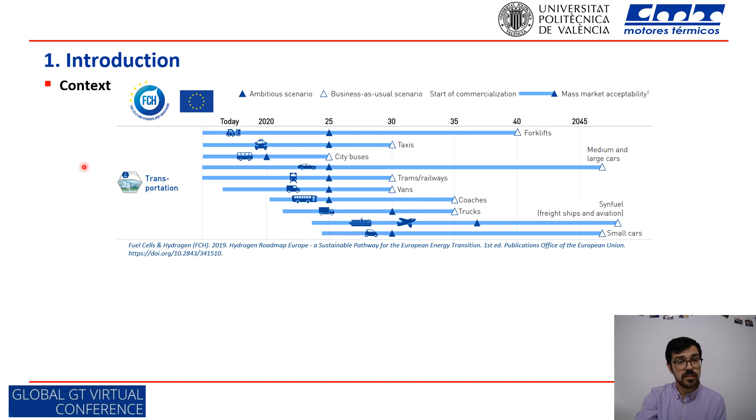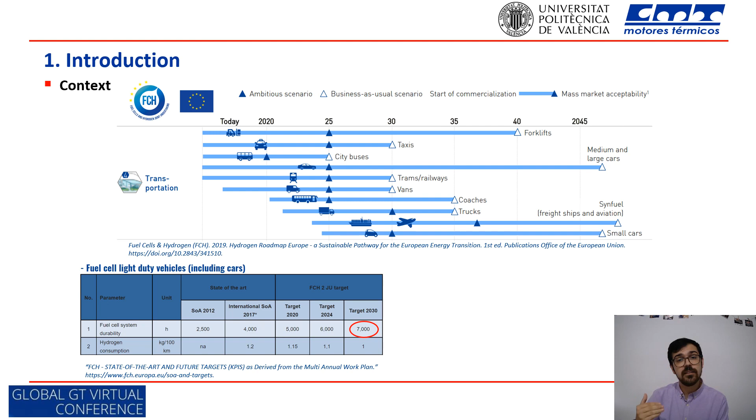So why have we focused our research on hydrogen fuel cell? Well, in Europe especially, but also in the industry in general, we have seen recently quite a lot of interest in developing hydrogen fuel cell technology to decarbonize the transportation sector, and in particular for the light-duty vehicle application, durability, together with the limited number of hydrogen refueling stations, are preventing the mass deployment of fuel cell vehicles.

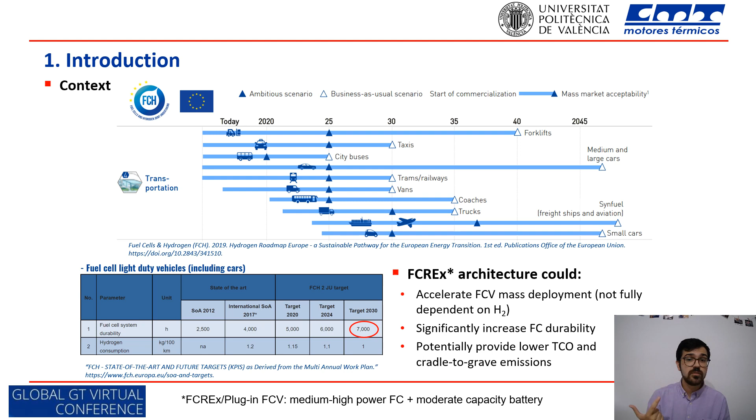So in light of this situation, what we did was propose a fuel cell range extender vehicle. It's like a plug-in vehicle with a medium to high power fuel cell and a moderate battery capacity. Since you don't depend solely on the fuel cell and on the hydrogen, you can accelerate the fuel cell vehicle mass deployment, increase the fuel cell durability, and potentially reduce the total cost of ownership and the cradle-to-grave emissions.

How do we face this problem? Well, at CMT Motores Termicos, we research fuel cell technology from the cell to the fuel cell vehicle level, focusing on both modeling and experimental activities. On the modeling side, we use GT Suite for 0D and 1D activities to model the fuel cell stack, fuel cell system, and fuel cell vehicle that we have used in this study, but we also use 3D CFD for the cell scale.

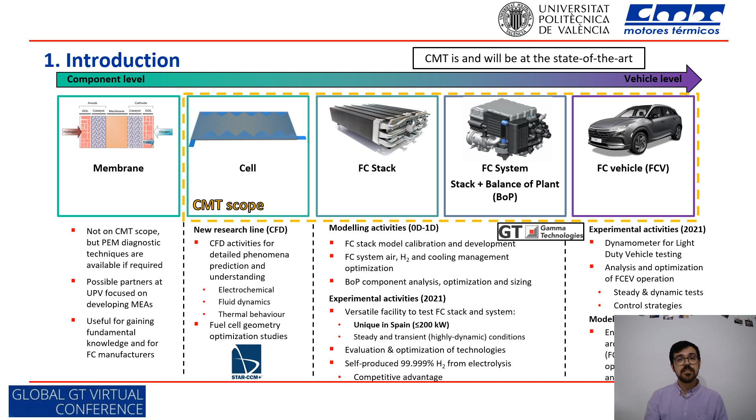Regarding the experimental activities, we have a test bench for fuel cell systems of up to 200 kilowatts and a high-purity, high-pressure hydrogen production facility to operate this testing facility. Furthermore, we have recently purchased a fuel cell vehicle, and we have a dynamometer where we are going to start soon the activities to do a technological assessment and obtain state-of-the-art data about the fuel cell technology.

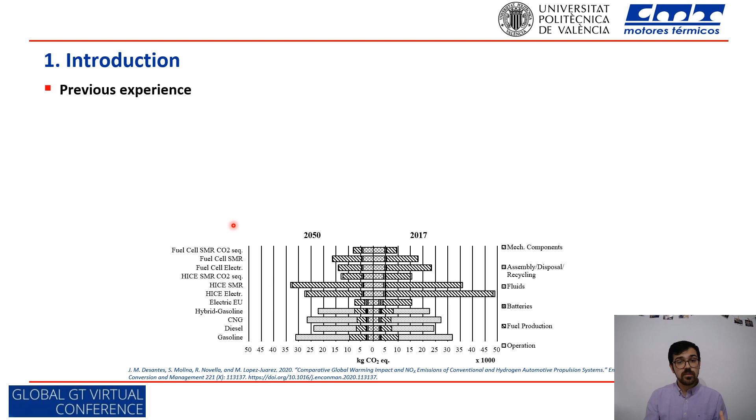However, before starting this study, we already did some studies. We started analyzing the cradle-to-grave emissions of the fuel cell vehicle technology with respect to the other technologies in the automotive industry, and we concluded that it is possible to actually decrease the cradle-to-grave emissions of the transport sector if we use the fuel cell technology.

Once we started with this, we couldn't stop, of course, and we started modeling activities to understand the impact of the fuel cell range extender architecture. So we developed these design spaces where you could obtain the hydrogen mass that you need in the tank, the hydrogen consumption, and the energy consumption by selecting a battery capacity, a fuel cell stack maximum power, and a target range for your vehicle.

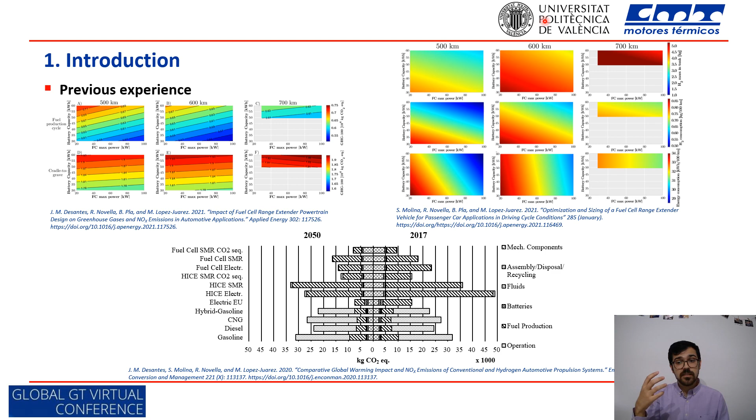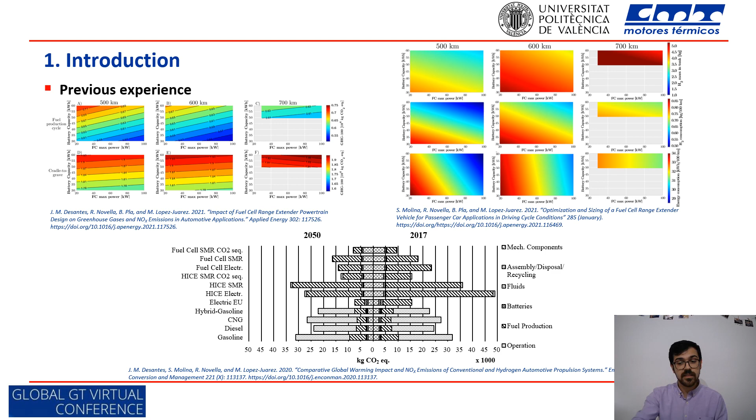These design spaces were then converted to cradle-to-grave emissions, and that allowed us to obtain the greenhouse gas and NOx emissions for different stages of the life cycle of the vehicle as a function of the same parameters as in the previous study. So, as you have seen, we don't usually look only at the performance part of the problem. We like to focus on the whole picture, such as cradle-to-grave, and in this study, degradation.

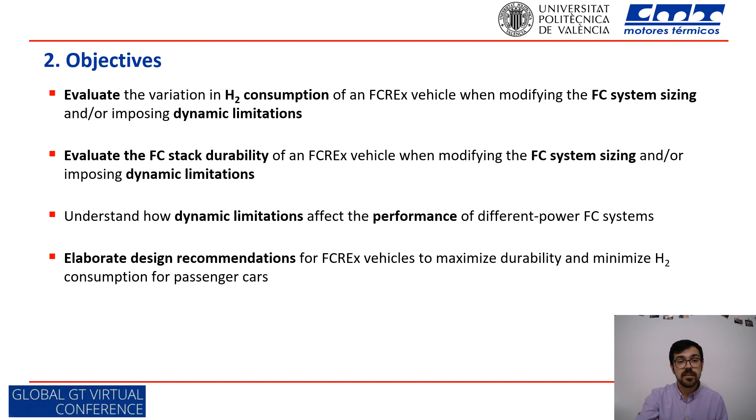So the objectives of this study are basically to evaluate the hydrogen consumption and the durability under different conditions of fuel cell stack sizing and dynamic limitation, then understand how dynamic limitations affect the performance for different designs independently, and to elaborate design recommendations for the fuel cell range extender architecture to maximize the durability and minimize hydrogen consumption for passenger cars.

The methodology that we followed is to do a set of simulations with different fuel cell maximum power and dynamic limitations in terms of the current density rate variation with time. What we knew at the very beginning was that increasing the number of cells of the fuel cell had an implication on the weight, but we didn't know the potential change in the operation region for the fuel cell, and what was the effect on degradation.

In fact, imposing dynamic limitations, we knew that, of course, it was going to have an implication on the energy management strategy, and of course on consumption, but we didn't know how much degradation was decreased when imposing this dynamic limitation.

What we really didn't know at the very beginning was, okay, we more or less can predict what is happening with the fuel cell stack sizing and dynamic limitations, but is there any cross effect between these two factors? Are the dynamic limitations equal for each design that we consider? So that's something that we answered in this study by using the GT Suite modeling platform, considering the fuel cell system models and the vehicle model.

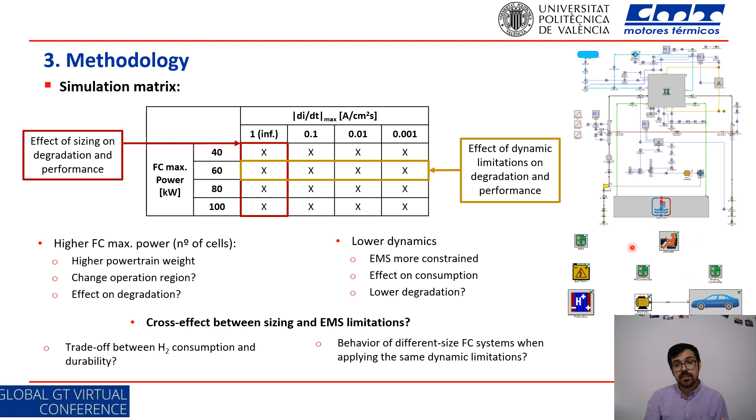So for that purpose, as I've just said, we use GT-SUITE and MATLAB. For the part where we use GT-SUITE, it was the powertrain modeling. So we validate and calibrate a fuel cell stack model, we designed the balance of plant, we optimize it and integrate it into a fuel cell vehicle. The second part was done with MATLAB, and this focused on optimizing the energy management strategy and developing a degradation model that was able to predict degradation during driving cycle conditions.

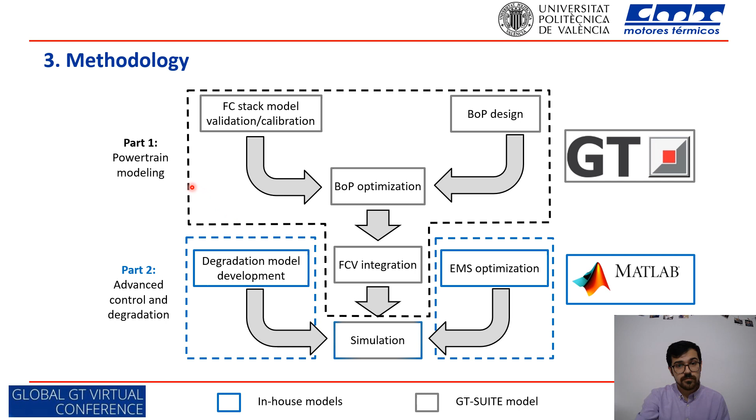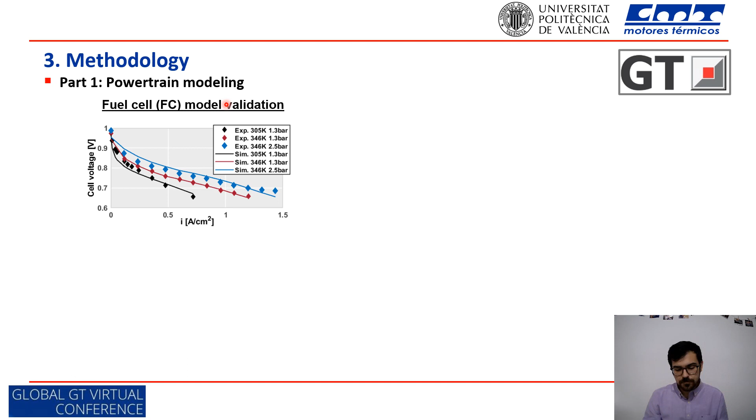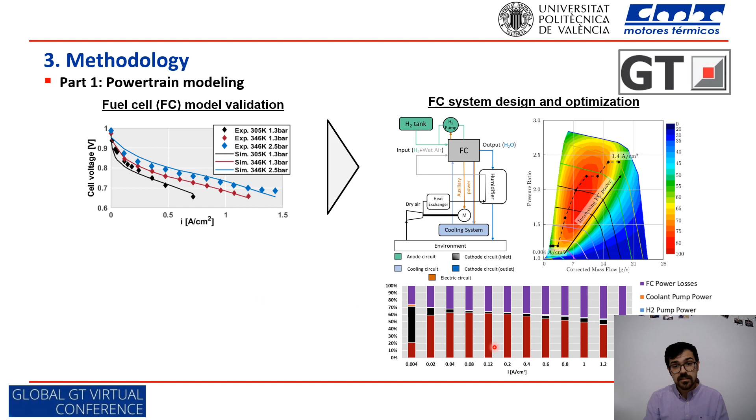So for the first part of the methodology, what we first did was to calibrate and validate a fuel cell stack model with GT Suite under different conditions of temperature and pressure, which is something that we actually expect in driving cycle conditions. Then we build up all the models, auxiliary components that the fuel cell stack needs to operate in driving cycle conditions. So we compose a fuel cell system and optimize it in such a way that we increase the overall fuel cell system efficiency over 60%.

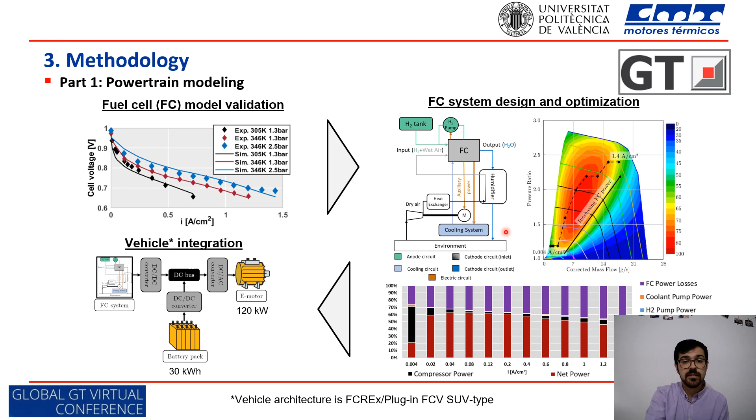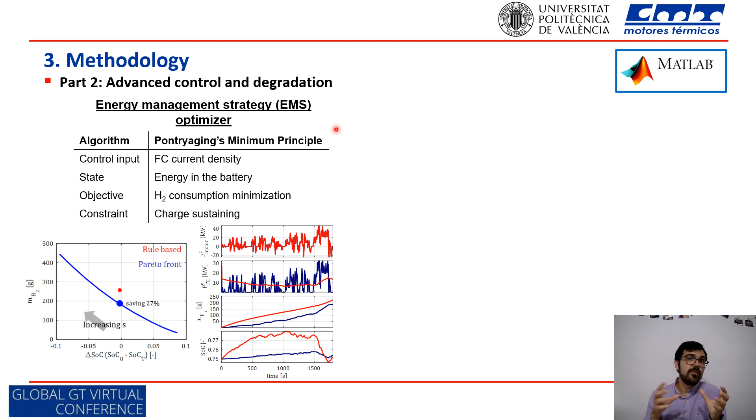Finally, we integrated this fuel cell system into a vehicle architecture with a 30 kilowatt hour battery and a 120 kilowatt electric motor. The second part was focused more on optimizing the energy management strategy. It was done with MATLAB with the objective of minimizing hydrogen consumption under the constraint of charge sustaining. For that, we use the Pontryagin minimum principle, which basically says that if you find the minimum hydrogen consumption at each step of time, then you will find the overall minimum hydrogen consumption along your driving cycle.

Then we developed the fuel cell degradation model, which is a model that we developed at CMT. The basic philosophy of this model is, okay, we have reference degradation rates that we have measured in laboratory conditions, and we are scaling these degradation rates based on two things. The first one is the electrochemical behavior of the fuel cell, that is, in this case, controlled by the voltage or the current density. And the second, the physical conditions under which the fuel cell stack is being operated. So in this case temperature and relative humidity, and we are scaling the degradation rate depending on the electrochemical and physical operating conditions of the fuel cell stack.

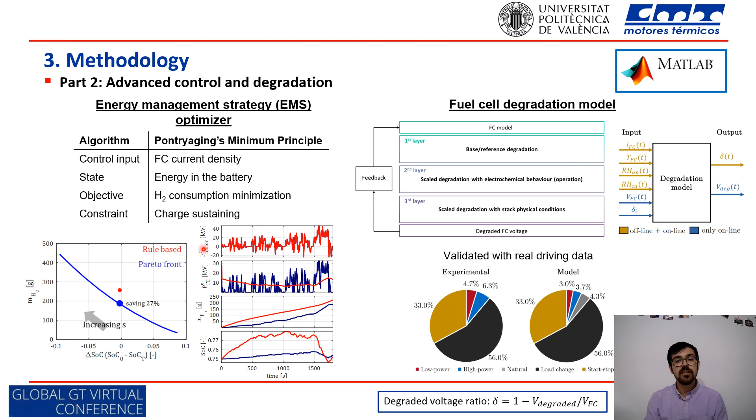We validated this model with driving cycle degradation data from the literature, and that's something that we have been using coupled with the energy management strategy in such a way that the two models are interconnected and they know what the other model is doing, so they can optimize each other.

So here we are going to see the results, and what we see is the current density evolution along the driving cycle for different designs and different dynamic limitations. These two designs are very dynamic in these two cases. And what we see is that when we decrease the number of cells, changing from the 100 kilowatt to the 40 kilowatt design, the current density increases. This is because if you have a lower number of cells to produce the same power, you will require higher current density.

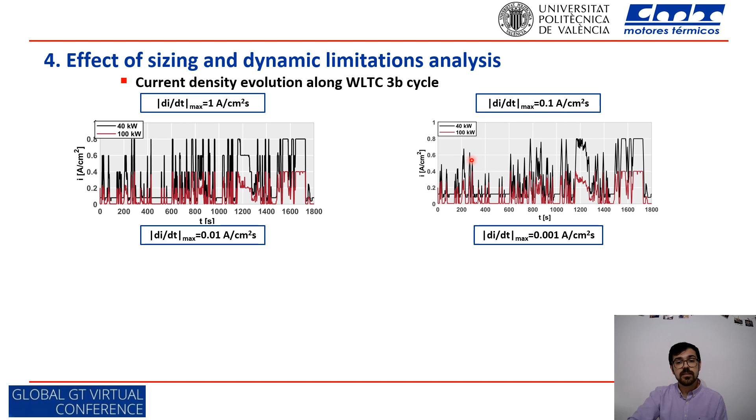And of course, if we increase the dynamic limitations, there are some peaks here that are not achievable because of the high dynamics. This has some implication in consumption because you are operating under suboptimum conditions, and this implies that the minimum current density here, in the case of the 40 kilowatt stack, increases to compensate for this suboptimum behavior. If we keep on increasing the dynamic limitations, we see how the models have lower dynamics, so the load change cycle intensity decreases.

And this has some implications in the most restricted case, because if you limit the dynamics of the fuel cell a lot, the charge sustaining conditions may not be fulfilled during aggressive driving cycles. So the overall effects that we noticed when limiting the dynamics was that the minimum current density increased. In the case of 100 kilowatt, we can see it when comparing these two simulations, because we need to compensate for the suboptimal behavior that we get when constraining the dynamics of the energy management strategy even more. The maximum current density decreases overall, and the load change cycles, both the intensity and the number, decrease.

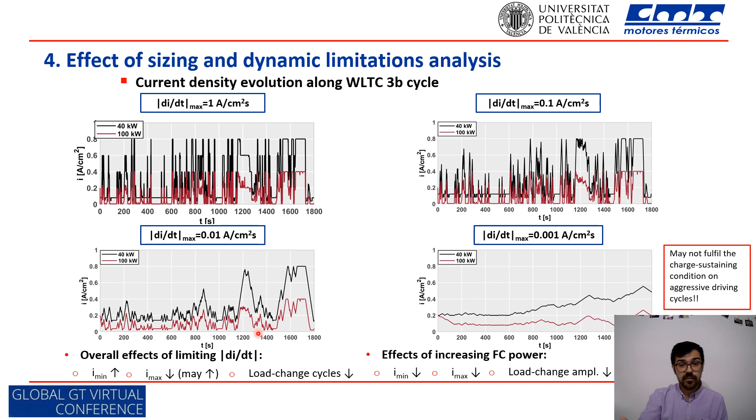However, if we increase the fuel cell power, we get a decrease in the minimum current density, a decrease in the maximum current density, and the load change amplitude in the cycles is decreased, because actually, if you have a 100 kilowatt fuel cell, changing the current density from 0.1 to 0.4 is not the same change in power as if you have a 40 kilowatt fuel cell stack and you change the current density from 0.1 to 0.3 to 0.4.

In this case, what we realized also was that, okay, yes, we see all these effects isolated, but when we take a look at the detail, we realize that everything that we have seen with respect to the effects of limiting the dynamics is also noticed in both designs, but they are less intense. They are dampened in the case of a 100 kilowatt design. So this means that higher power designs are less affected by these dynamic limitations, but they are affected.

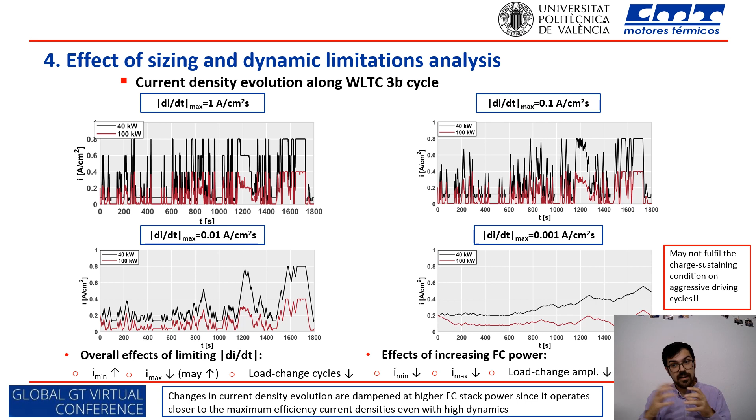In the case of the dynamic limitations, what we see is that increasing the dynamic limitations decreases the degradation rate, so it is increasing the life, the durability, but it increases the hydrogen consumption, so the operation cost, due to the fact that, yes, you are maximizing the life, but you are constraining the EMS, whose only objective is to minimize hydrogen consumption. So you are going to get some penalty on hydrogen consumption. And of course, there are no changes in production cost because the design is constant.

If we take a look at how the degradation rate sources are evolving, what we realize is that in the very beginning, with almost no limitation, the major source of degradation was load change degradation. But as you increase the dynamic limitation, it becomes a minor source of degradation, and other sources of degradation, such as start-stop and idle degradation, are more and more significant.

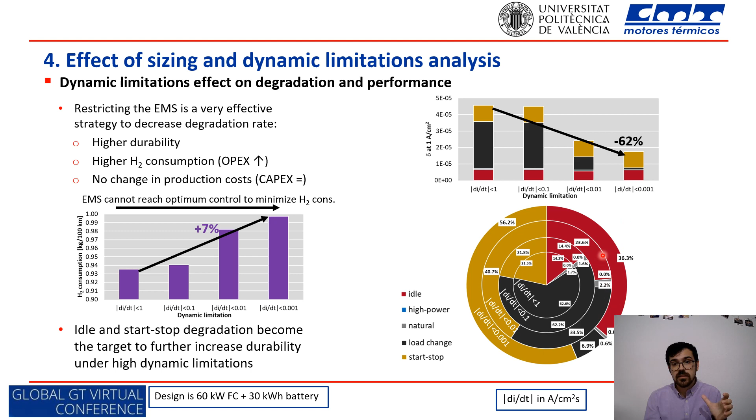And this is important because, if you are a fuel cell stack manufacturer and you know that your fuel cell stack is going to have certain limitations because it's a fuel cell range extender, for example, then you would probably like to focus on minimizing the degradation rate under high voltage or idle condition. So that's a way of applying this knowledge.

In contrast, the effect of the fuel cell stack sizing on degradation and performance is quite different. As we increase the fuel cell maximum power, we are decreasing the degradation rate and increasing durability, but we are also decreasing hydrogen consumption because we are decreasing the operating current density. So the fuel cell system is operating under a higher system efficiency. However, we didn't notice any benefit in hydrogen consumption from the 80 kilowatt design.

If we take a look at how the degradation rate source evolves with different designs, at the 40 kilowatt design the major degradation source is load change, and it is also the major source of degradation for the 100 kilowatt. However, it is significantly reduced because the load change cycle amplitude is also reduced.

So in this case, we see that fuel cell stack sizing implies higher durability, lower hydrogen consumption, but higher production cost. What we recommend here is that the vehicle manufacturer takes into account the durability they want for their fuel cell stack. According to that, they should calibrate the fuel cell stack size and also the dynamic limitations in such a way that you have a durability similar to the expected durability, and do not increase the dynamic limitations, because then you will get a penalty on hydrogen consumption.

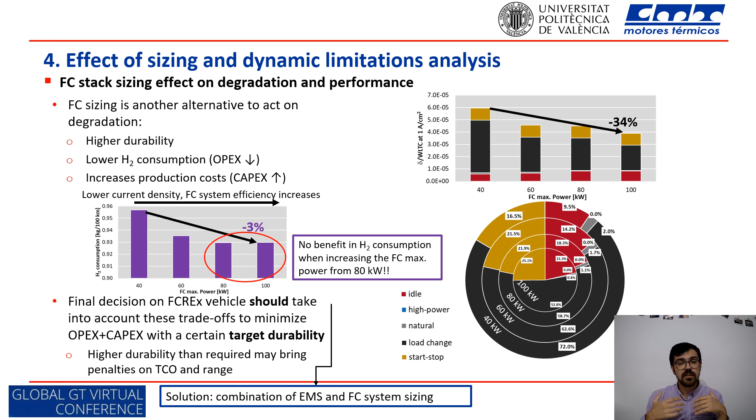When we combine the effect of performance and durability, we see the same trends, but at very high dynamic limitation, 0.01 or 0.001, we actually see no benefit in changing the fuel cell stack sizing, because both the hydrogen consumption and the durability are quite similar.

So we need to take into account that if we are a vehicle manufacturer manufacturing, for example, a conventional fuel cell vehicle, then the sizing is very important. But if you are thinking of a fuel cell range extender vehicle and you are going to have some limitations on the dynamics, then maybe sizing is not that important. So this is critical and needs to be taken into account.

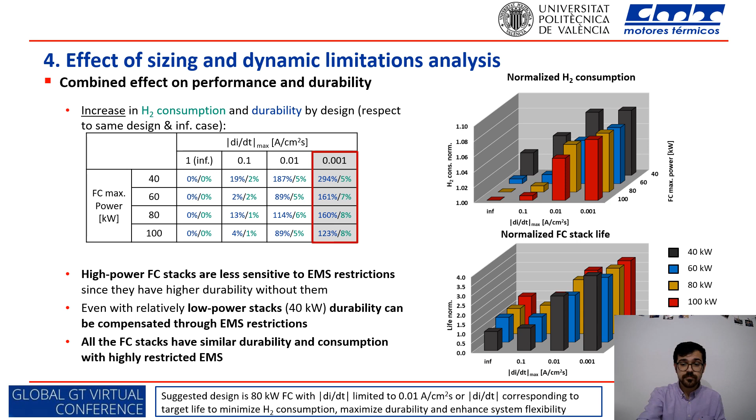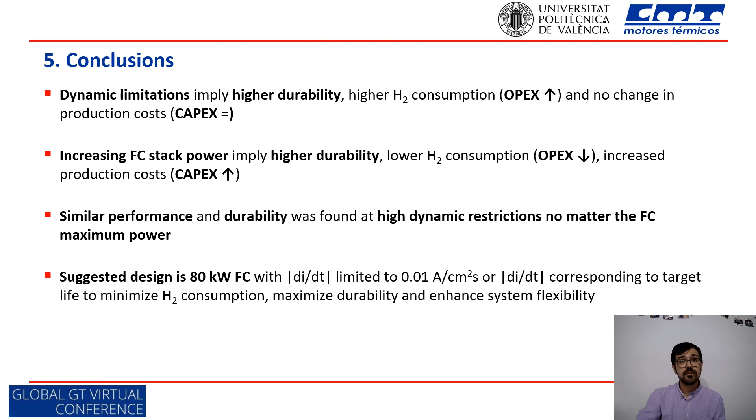So the conclusions are basically that the dynamic limitations imply higher durability, higher hydrogen consumption, and no change in production cost, while increasing the fuel cell stack power increases durability, implies lower hydrogen consumption and increased production cost. But with very high dynamic limitations, the effect of fuel cell stack sizing is not that relevant. What we suggest is a design with an 80 kilowatt fuel cell and a dynamic limitation that is enough for the target life the vehicle manufacturer wants, to maximize durability and minimize hydrogen consumption. So thank you everyone, and if you have any questions, feel free to ask.